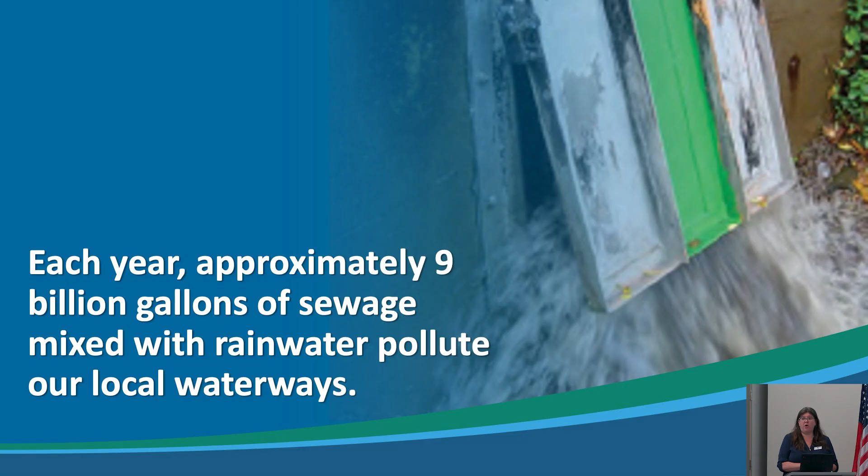ALCOSAN, through many decades, and in partnership with our customer municipalities, have been working towards improving the water quality and helping protect those waterways that are really an identifier for this region, for the city of Pittsburgh, and for Western Pennsylvania as a whole. The plan to reduce those overflows and meet water quality standards in our rivers is called ALCOSAN's Clean Water Plan. This plan was approved in 2020 in response to our modified consent decree, which is simply a layout of how we're going to comply with reducing overflow volume and meeting those water quality standards.

The first phase of projects must be complete by 2036 and involves over $2 billion of infrastructure investment right here in our area. The plan will reduce overflows by 7 billion gallons each year. There's other benefits to investing in local infrastructure, including job creation, additional capacity in our sewers that are the backbone to allow development in different parts of the service area, and you'll hear that come up with our communities tonight.

The plan is broken into 4 key pillars. We're expanding the treatment plant so that we can treat that 7 billion gallons that's going to come into the system instead of into the rivers. We're building our regional tunnel system, which is a redundant system to what we have currently in the ground with the original construction, and that's to pick up those 7 billion gallons and get it to the plant for treatment.

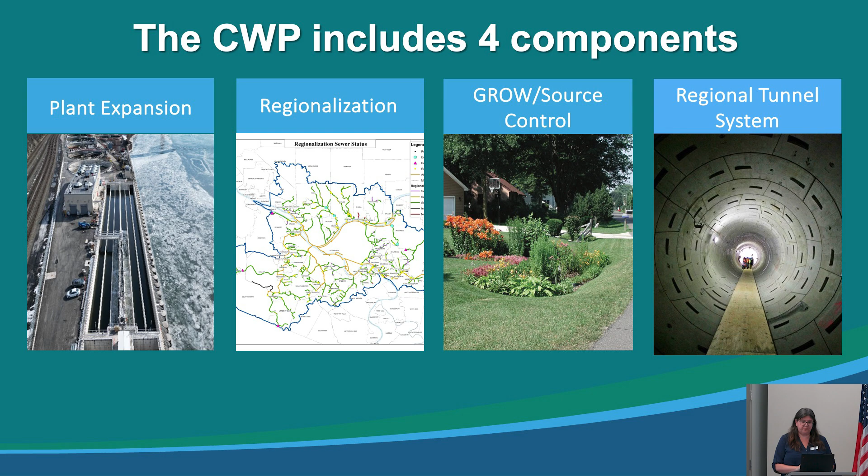And then we have the 4th pillar, which is regionalization. It's what brought us here tonight. And that program is about ALCOSAN taking more responsibility for critical infrastructure across our service area. This program is the voluntary transfer of certain infrastructure from the municipality's ownership, financial responsibilities, and operation responsibilities to ALCOSAN.

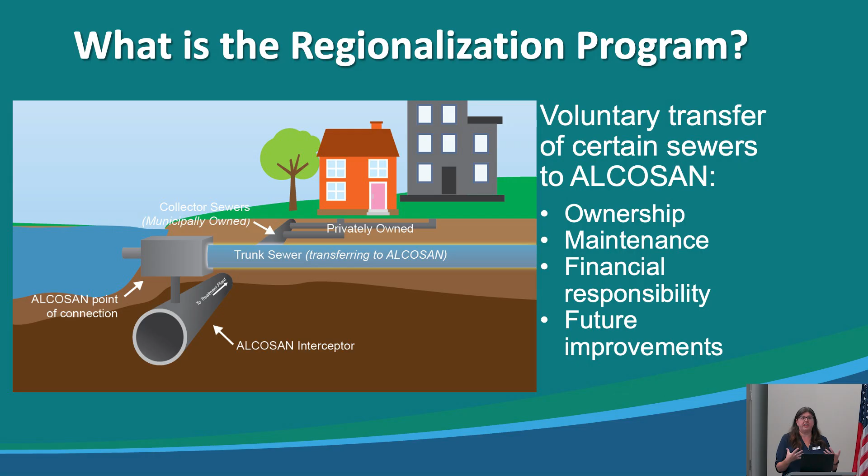Then you have what ALCOSAN has traditionally owned, which is the connection point for treatment and then the deep interceptors that are large diameter and bring all that flow down to the plant. These trunk sewers are what's eligible for transfer. They're defined as anything 10 inches in diameter that conveys flow from more than one municipality.

When you apply that criteria to the ALCOSAN service area, we found 265 miles of sewer were eligible, along with this infrastructure along them. This is critical because our consent decree says we have to make a good faith effort to transfer at least 200 miles, and with this criteria, we met that and exceeded it.

There's 95 regulator structures, and I want to point that out because those are the points in the system where overflows are allowed to occur or are occurring if they're sanitary sewer overflows. Currently, the municipalities own 95 of those structures plus more, but 95 of them are eligible to come over to ALCOSAN under this program, making us responsible for addressing them, controlling them, or eliminating them if they're an SSO.

There's also 4 pump stations, which are simply places where gravity cannot push the flow, and they're lifted by pump to then continue onto the plant for treatment. And 4 equalization basins, which is where water's held back during wet weather, and then once the system has recovered and the storm has passed, we're allowed to relieve that back into the system. That helps us also reduce overflows.

This region has been working on this program for a long time. It was first presented to us in 2008 in our consent decree with that guidance of take 200 miles. But what does that mean? We could find 200 miles in any one individual point of connection in the system. That's not really the point of the program. So we convened a group of stakeholders across the rich academic community in the region. A lot of our municipal partners were involved to say, what is the criteria? They came up with that 10 inches in diameter

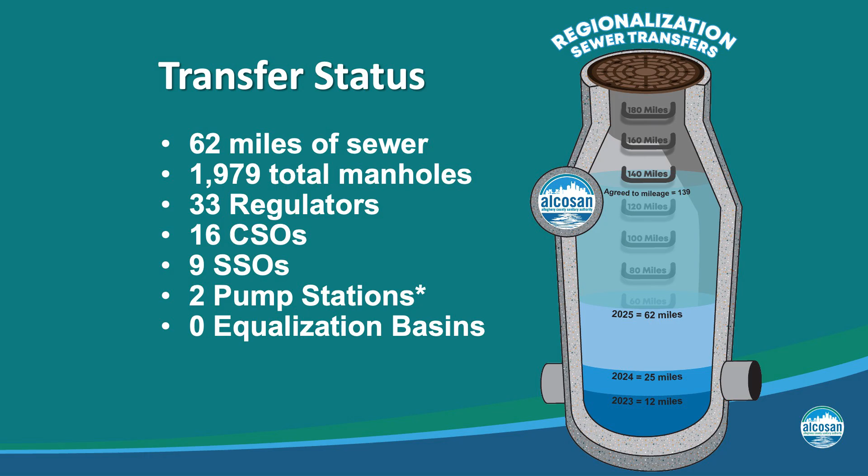So in these municipalities tonight, we're focusing on what we'll call the Robinson Run Trunk Sewer. This extends from Oakdale, McDonald, North Fayette, South Fayette, and does include 1 pump station on it. It's a combination of gravity sewers and force main. It's about 9 miles of infrastructure that we're talking about transferring.

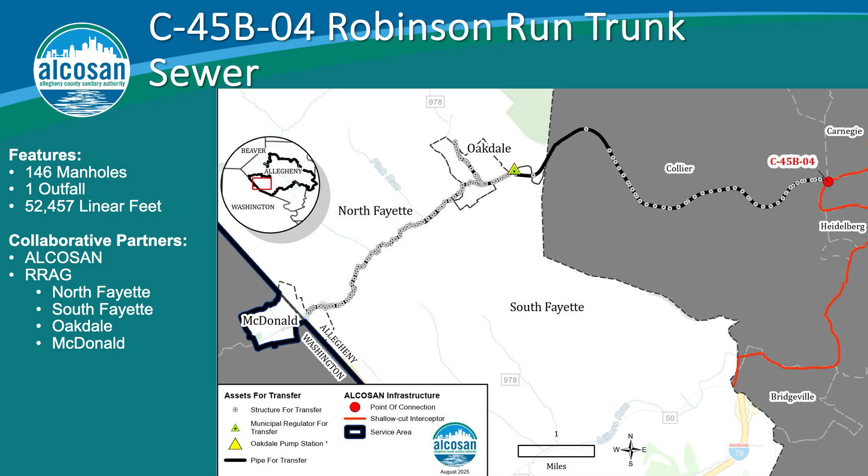These partners have been tremendous in, especially I would say the last 3 years, really focusing and moving the project forward thoughtfully and responsibly to make sure that each municipality is being heard and represented in the project that we're here to talk about tonight. Before I turn it over to the designer to talk about the details of the project, I want to remind the group this is an Act 537 plan special study.

It is the first one that we have in regionalization, and any Act 537 plan is a requirement if you are the owner of sewer facilities that serve the public in the Commonwealth of Pennsylvania. So we're here to fulfill that requirement. The point of them is to hear from the public and get your feedback on what we plan to build in your local neighborhood. And with that, I'll turn it over to Bob Dengler to talk about the details of the project.

Thanks. Thank you, Julia. I'm Bob Dengler with GFT, the designer for the project. And as part of the design, we've been assisting ALCOSAN with the preparation of the Act 537 plan special study. The project area is outlined here in red, and the existing pump station sits here at the eastern edge of Oakdale Borough at the end of Industrial Park Drive. Actually, the site where the pump station sits is in North Fayette Township.

It was the former site of the Oakdale wastewater treatment plant until I believe the late 80s when the plant was decommissioned and flow was sent to the ALCOSAN system. And then we are going to increase the size of the interceptor along Robinson Run up to the middle of Oakdale Borough here, intersection of Union Avenue and Noblestown Road.

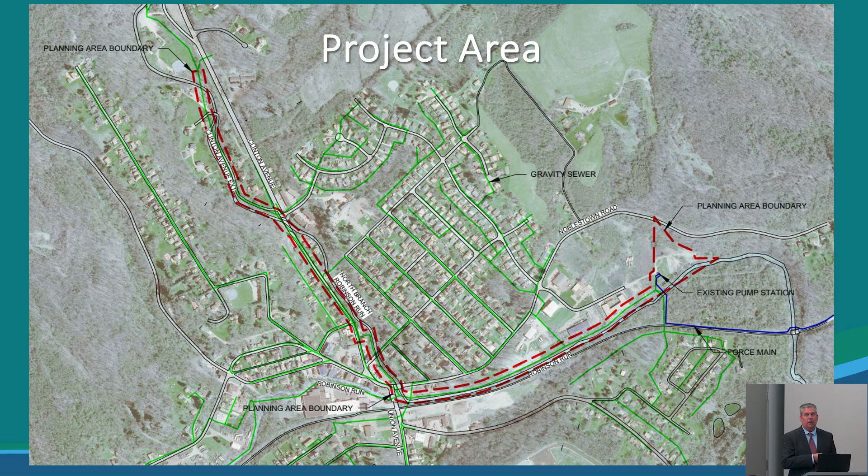And then we are going to increase the size of the North Branch interceptor up to the boundary between Oakdale and North Fayette Township. And really the driver for the upsizing of these facilities, the sewer lines, is the additional capacity that North Fayette Township is requesting in the system. They are looking to increase capacity by 700,000 gallons per day.

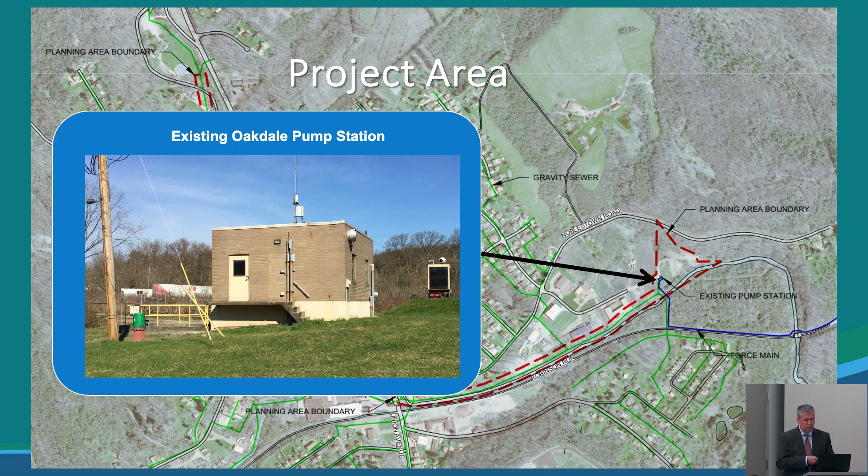So focusing on some different aspects of the project area, right now the Oakdale pump station looks like this from this picture. The building was originally constructed in the 1960s with the Oakdale treatment plant at the time, repurposed to pump sewage to the ALCOSAN system in the 80s, and is now beyond its useful life. So the plan is to replace the pump station with a brand new pump station, as well as the construction of a 1.3 million gallon equalization tank. And that tank will help to reduce the incidence of sanitary sewer overflows (SSOs) at the site.

So when the flows get to the point where they overwhelm the dry weather pumps during wet weather events, rainfall, snow melt events, the wet weather pumps will then pump up into the equalization tank, which will retain that water, and then when the wet weather event subsides, that water will be drained from the equalization tank into the pump station and pumped into the ALCOSAN system.

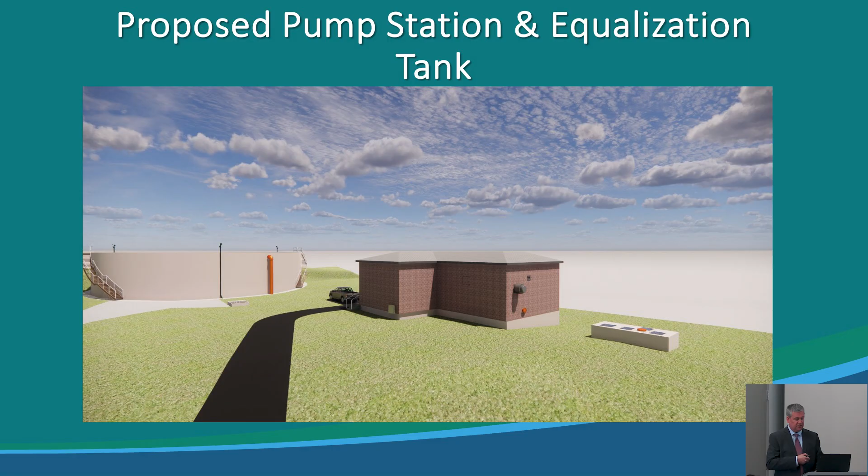And I'd like to point out that this pipeline upsizing is going to happen primarily within the trench line of the existing pipe. The contractor would actually remove the existing pipe and put the larger pipe in the same alignment and in the same easements, except there's a couple of areas where we're going to need to deviate from that alignment. But for the most part, the sewer line is going to be placed in exactly the same spot where it is right now.

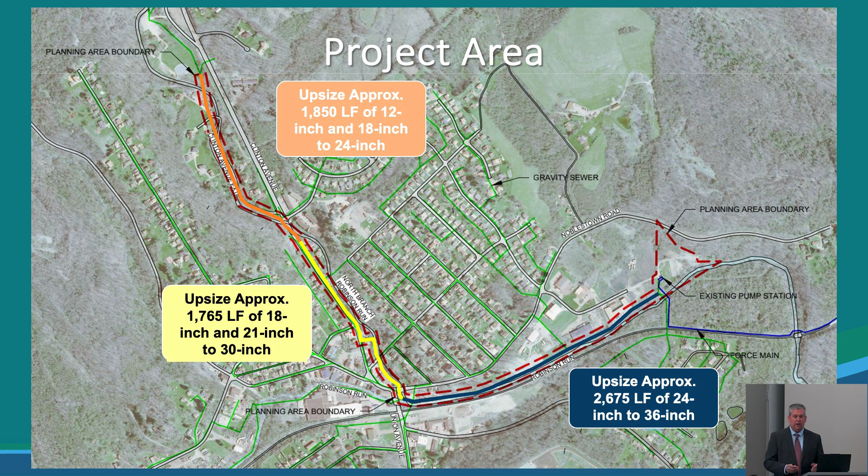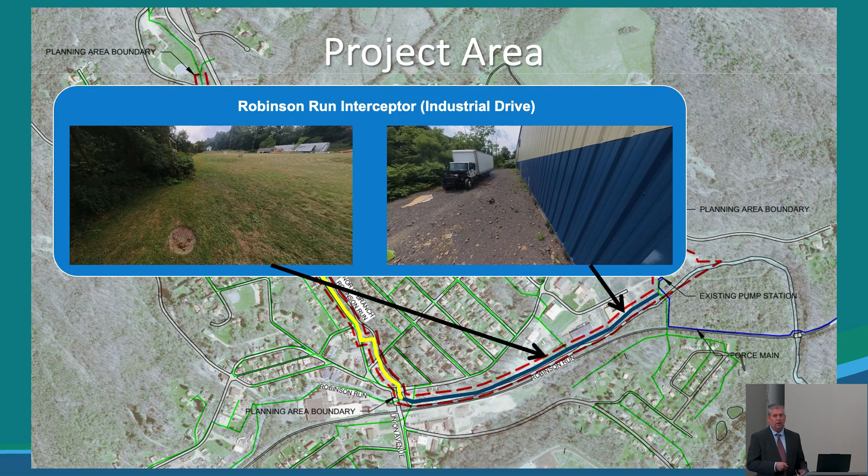And then coming upstream, there's a kind of grassy area where the sewer line resides, but then you get into kind of a stream bank. So part of the project will include stream bank restoration where needed. We're going to have to obtain the proper DEP permits in order to construct in the stream bank and restore the stream bank as required.

And right here at the intersection of Union Avenue and Noblestown, there's a couple of bridges there. The North Branch sewer line comes down underneath the bridge of Noblestown Road that takes Noblestown Road over the North Branch of Robinson Run. So there we'll probably have to bore and jack, which is really kind of tunneling the sewer line underneath that bridge, because it's very limited access to get equipment underneath that bridge to be able to construct the sewer.

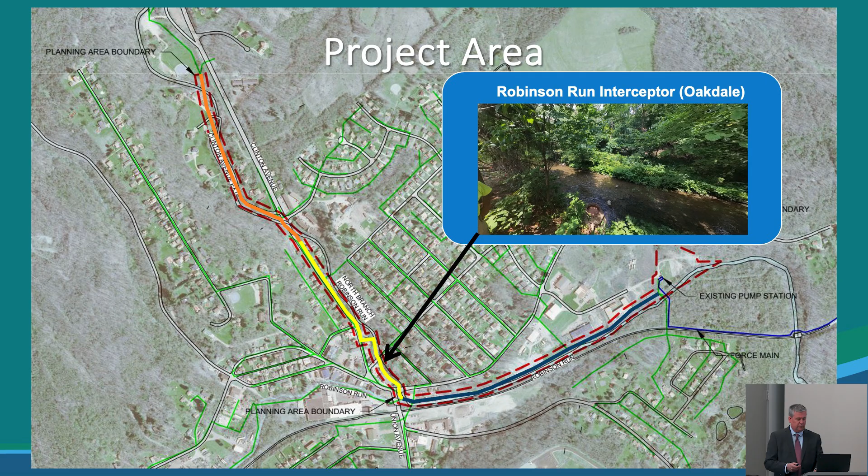Now moving upstream on the North Branch, one area where we will have to deviate from the existing easement is right underneath the bridge that is owned by Oakdale Borough on First Street. The existing sewer line is kind of encased in concrete right next to the bridge abutment. Really don't want to disturb that. So our plan is to go across the other side of the creek underneath the bridge. There's a little bit more room. We'll go across and then come back. So that's going to be probably the main area where we're going to get out of the existing alignment, but we'll get back into it as we go further upstream.

And then the sewer line alignment bounces out here to Clinton Avenue, otherwise known as Route 980. And so the sewer line is really just to the east of Clinton in the sidewalk. We'll have probably some minor traffic control when the sewer line is being constructed, but it's not going to be within the travel lane.

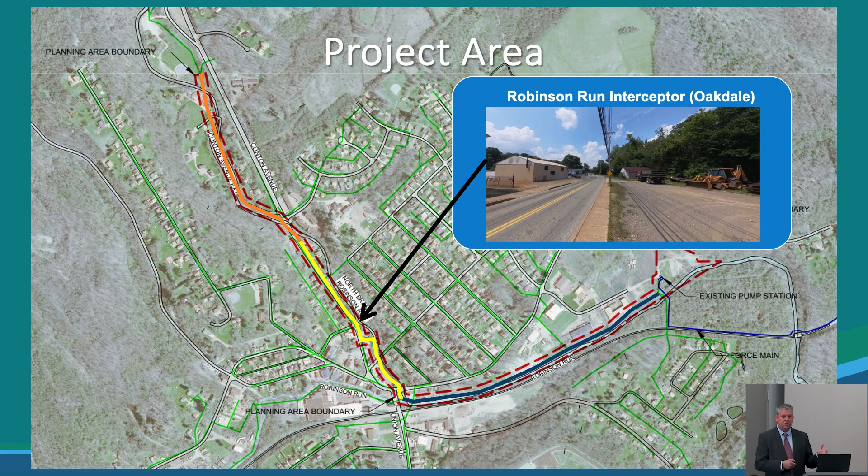And then moving upstream here, where Clinton Avenue crosses the North Branch of Robinson Run, that's another area where we're going to have to deviate again from the alignment. We're going to go across Clinton Avenue to the other side and then cross the creek on the west side of Clinton Avenue and then follow up where the orange is showing. That's the Clinton Avenue extension.

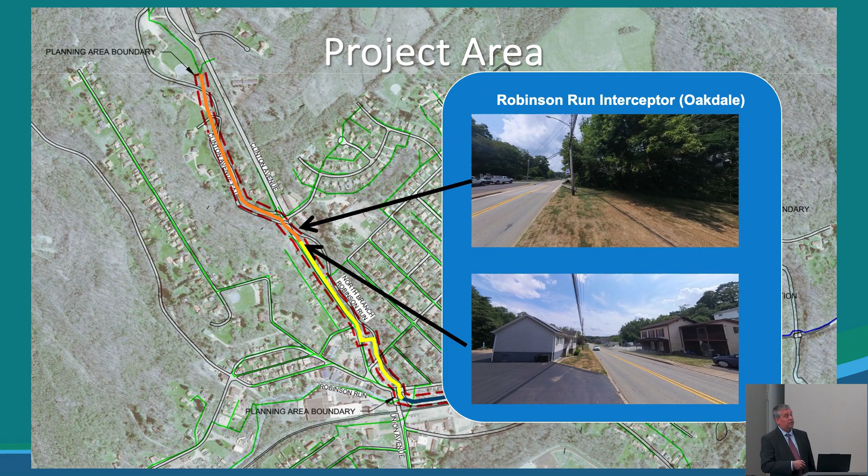And essentially, we're going to be following the existing sewer line along Clinton Avenue extension up to the end of that road, where there's a ball field here at the border of Oakdale and North Fayette Township, and that's where we're going to connect with the North Fayette Township sewer line. And anything upstream of that will be a separate project that will be constructed by North Fayette Township to, again, upsize the facilities to handle the increased capacity that they need.

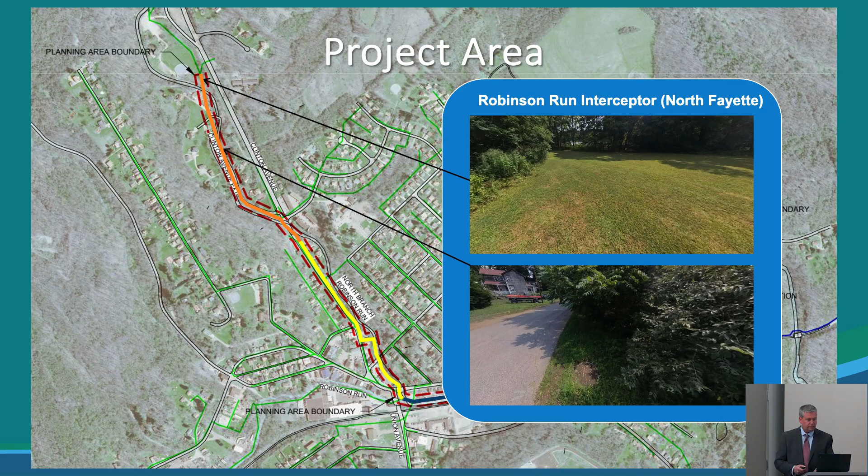So the Act 537 study that Julia mentioned previously, that's required as part of a planning document for the project. The study addresses a number of items that we have to look at. We look at previous wastewater planning and current conditions, and we look at all the planning that was done by the municipalities over the past several decades, going back to 2013 and even previously. We look at that and pull that into our plan. We look at service population flows and loading projections. Again, North Fayette Township's request for additional flows. And then we look at proposed facilities to be able to handle these needs and look at alternatives.

We looked at a number of different alternatives, and this really did piggyback on the alternatives that the municipalities looked at back in 2013 and other plans. We looked at, could we keep the existing pump station, maybe rehabilitate it? Really wasn't a good alternative because of the age. We looked at utilizing the existing pump station as a wet weather pump station, and that really didn't work out either. Really the most cost-effective and long-term solution was to build a brand new pump station and decommission and demolish the existing pump station.

We look at the financial and institutional evaluations. In this case, ALCOSAN will be the owner-operator of the pump station and the sewer lines. Then the implementation schedule, and then the public stakeholder participation, which this meeting is a part of. We have a public comment period for 30 days, and that's a pretty important component of the plan for public input.

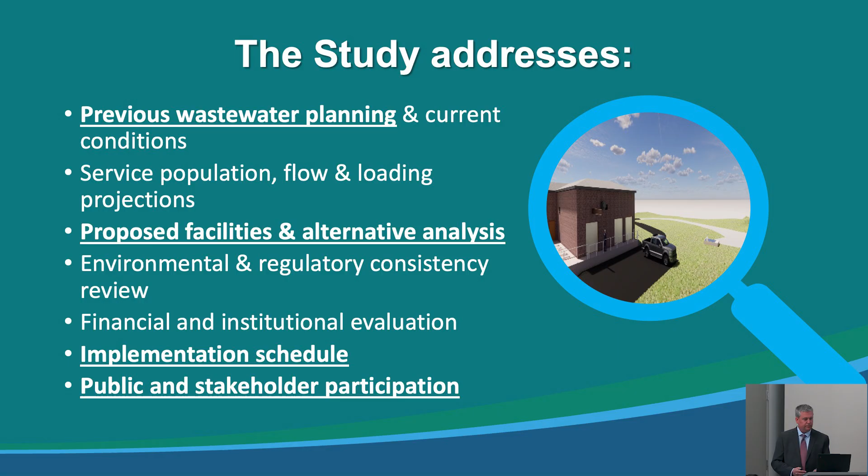So looking at previous studies and how this kind of flowed into this plan that we're working at right now. I mentioned previously we looked at the municipal feasibility studies going back to 2013, maybe even earlier than that. And that kind of coincided with the ALCOSAN basin planning. So those studies converge into the preliminary basis of design report. And ALCOSAN had us look at this about 5 years ago when the regionalization program was really starting off. Some preliminary plans to upgrade these facilities.

And then at that time, we're working hand in hand with North Fayette Township and their folks as far as building upon the Act 537 plan that they produced for their upgrades in their system. And municipal input discussions, meetings with the municipalities in order to just make sure everybody's on the same page with the plan moving forward.

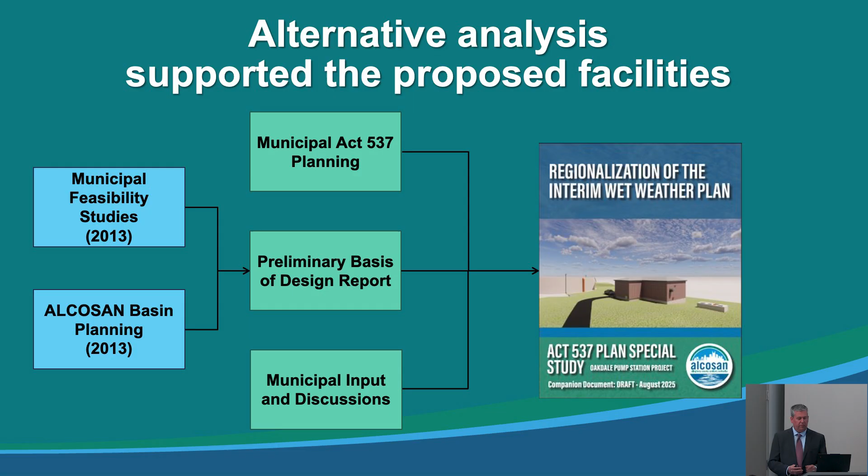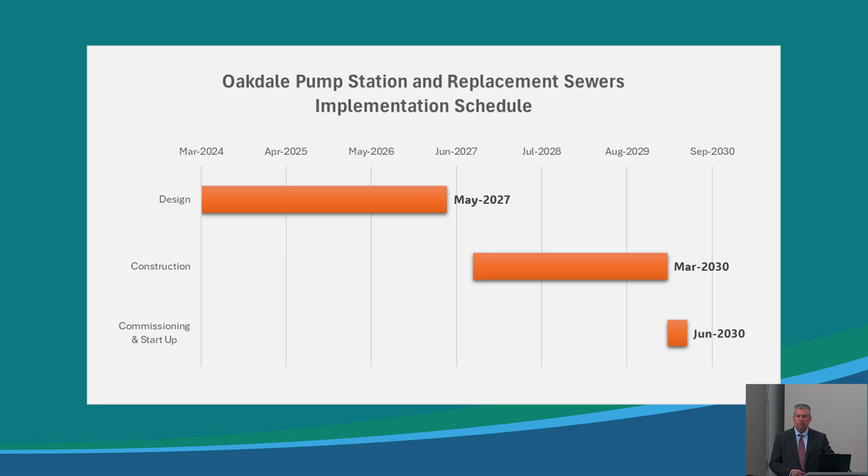And then the commissioning will be in around June of 2030. So June of 2030 is a date that we're anticipating the project will be ready to be turned over and ready for operation. And I'll hand it back to Julia for the Act 537 Special Study Outreach Schedule.

Thank you, Bob. So yes, we had worked very diligently and collaboratively to reach this point. Some of the milestones that we've achieved specific to this plan in 2025 were the release of the Act 537 plan special study to municipalities. I don't want to forget to mention that North Fayette also has a plan for some of the work that they have going upstream of this connection. So we've coordinated that effort. The municipalities previously had prepared an Act 537 plan that was improvements to the lines that we're now taking under regionalization. So we looked at that and really coordinated carefully with the work that has been done.

Then in July, we collected comments from the municipalities, as well as receiving some of that initial feedback from the regulatory agencies. In August 2025, we're now ready as of tonight and today to open up that 30-day public comment period. So we want to hear your feedback so that we can update the plan as appropriate. October of 2025, depending on what comments we receive back, we hope the municipalities are able to pass their resolution, allowing us to submit the plan to DEP. And then in November 2025, we want to go ahead and submit this plan to DEP for their review and comment.